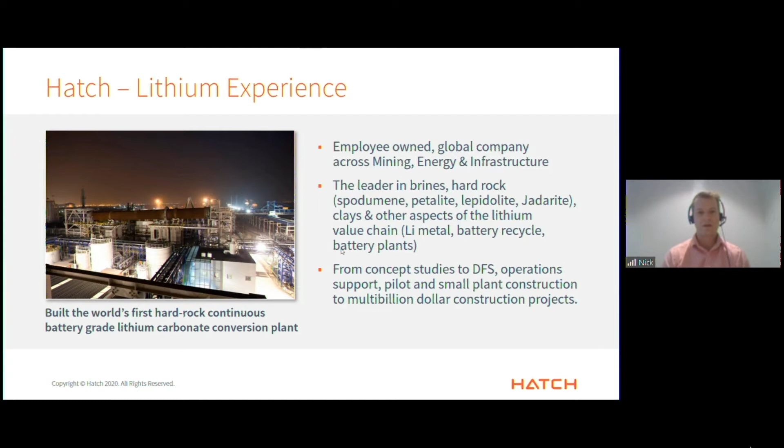Just to regain some credibility, I want to give you a brief overview of our lithium experience. We've been playing with lithium for over two decades now, well before it was in vogue, and even now. We've worked across the spectrum, including building the first continuous hard rock processing plant, which was done in China.

So the carbon imperative - why lithium? Why is this important? Why are you listening to me? Lithium is a key enabler of reducing greenhouse gases. Its position in the periodic table, in the top left-hand corner, makes it the ideal choice for use in transportation. It's light and it carries a charge that enables batteries to be used in transportation sectors. And what this does is build economies of scale and infrastructure such that it can then be used in other applications, specifically to enable renewable energy to be stored and used when it's required most, as the people in Adelaide and South Australia are certainly well aware.

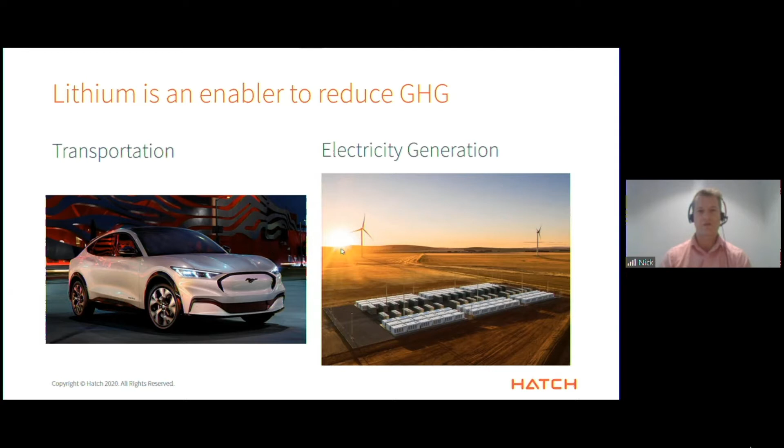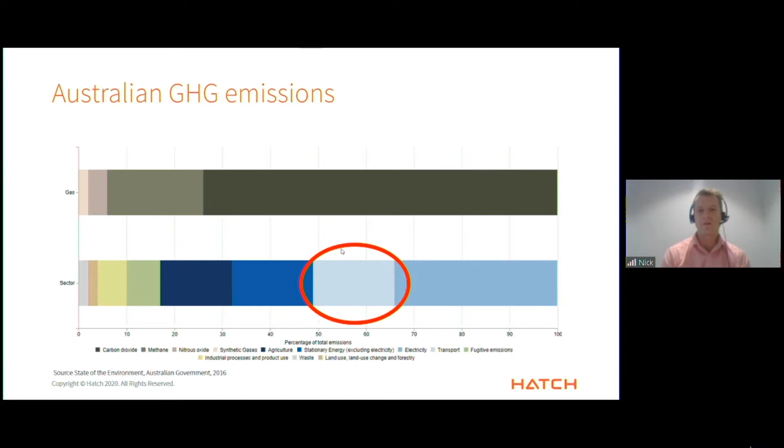So looking specifically at transportation then, because that's the real key to the growth in lithium. Looking at Australia's greenhouse gas emissions, you see about 15 to 18% is associated with transportation, and you find emissions are relatively consistent across different countries. In the United States, for example, in 2017 transportation accounted for about 29% of their overall greenhouse gas emissions. Predominantly within the transportation sector, the majority were associated with light duty vehicles - those that we're most able to replace with battery instead of internal combustion engines.

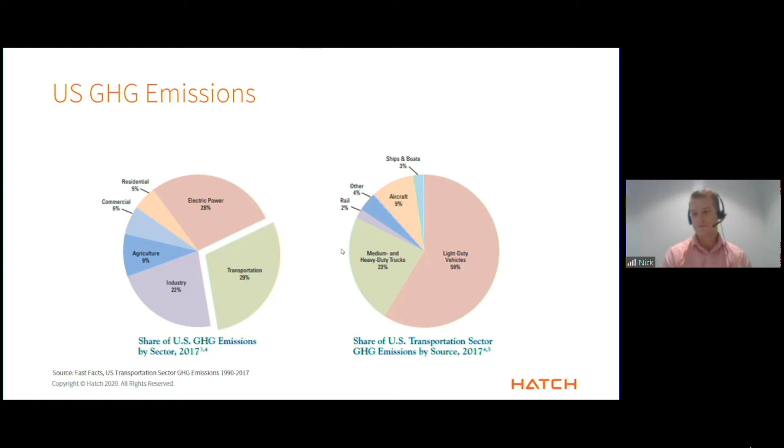Looking wider in terms of global transportation emissions, the graph on the right shows the increase in greenhouse gas emissions attributed to transportation. Again, it's the same story - within that transportation, the emissions are growing, predominantly due to road and vehicle transportation. So even within the transportation sector, the proportion associated with vehicles is increasing. If we want to be serious about tackling greenhouse gas emissions and reducing our profile, global transportation is a very large sector for us to look at.

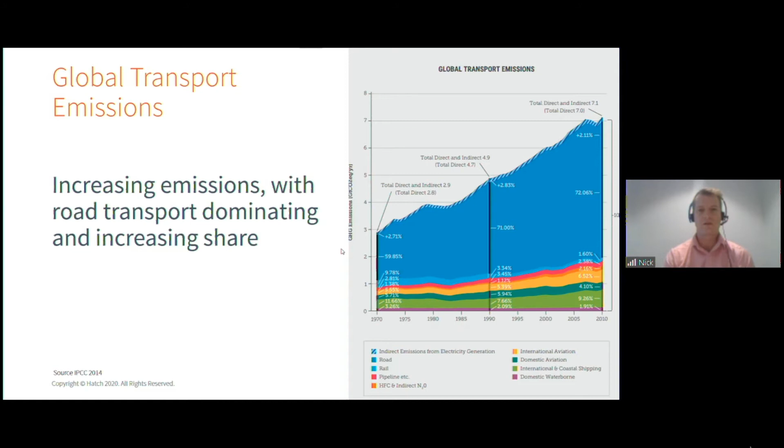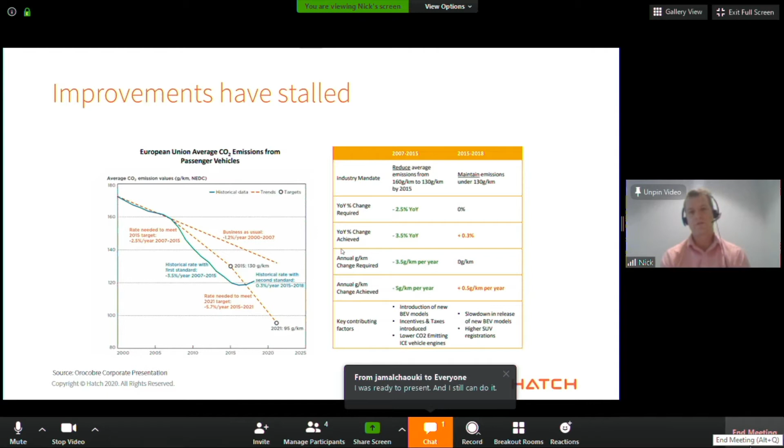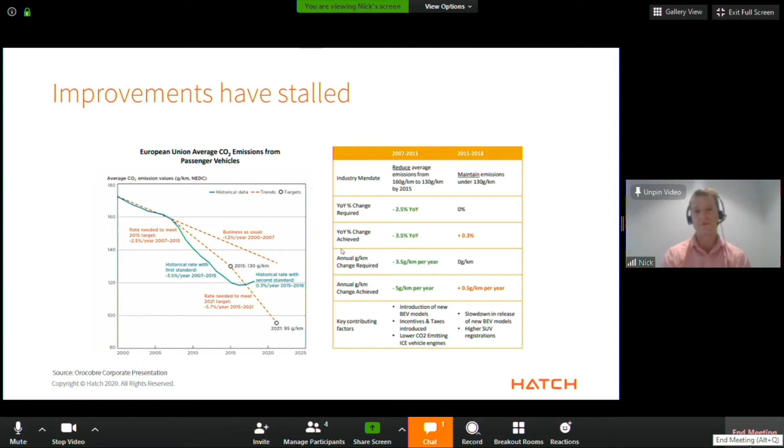And to add some pessimism, the improvements have stalled. We've seen pretty dramatic decreases in average CO2 emissions, coming predominantly through increasing efficiencies of internal combustion engines, with some replacement. But about 5-6 years ago, the downward trend stopped, and we're no longer able to achieve these targets without moving towards a more electrified transportation sector. So a step change is required if we're going to further reduce our greenhouse gas profile.

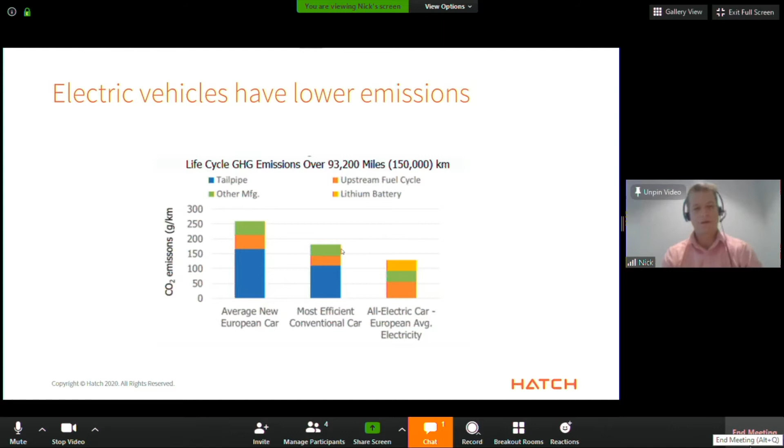Notice here that the yellow section of the graph is the lithium battery, and that's key. So that's a pretty reasonable difference between an internal combustion engine and an electric vehicle. I just wanted to explore that, particularly early on when you're looking purely at the manufacturing to get it.

So let's look into what's causing that increase in greenhouse gas emissions during battery manufacturing. I've got two graphs here. One looking at greenhouse gas emissions of the battery pack - that's this column on the right-hand side - looking at battery pack manufacturing as a whole. You'll see a reasonable amount, almost 40%, is associated with what's called the cathode. In this particular example, it's NMC 111.

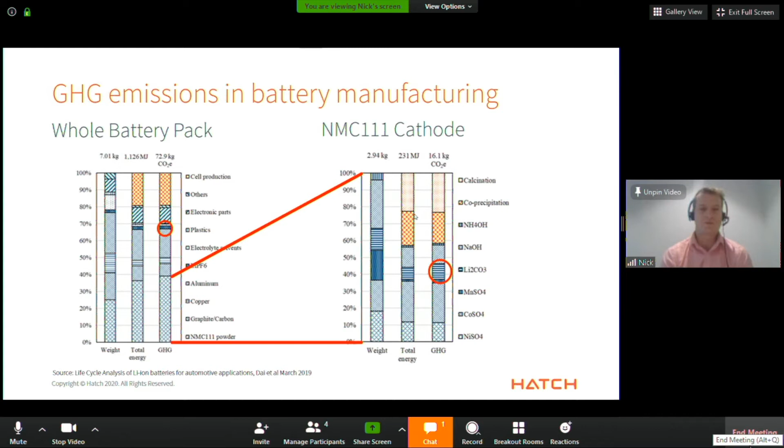This second graph is expanding that section of the graph further and looking at its constituents. So you see a couple of things. I've highlighted the different aspects associated with lithium. There's a tiny contribution here associated with lithium hexafluorophosphate, which is the electrolyte within a battery pack, and then there's the lithium carbonate contribution to the overall cathode. So the real key point here is none of this happens without lithium. Lithium's a key enabler, but it's not a significant contribution to the overall greenhouse gas intensity of battery manufacturing.

So what I want to do is just look within the lithium industry and give people a bit of background around the industry. Fundamentally, there are two main sources: you've got the brine and the hard rock, which is predominantly spodumene. These account for over 90% of your lithium.

Your brines are evaporated lakes, typically in South America, Atacama for example. Your hard rock is typically spodumene found in Western Australia, Canada, and to a lesser extent China and Brazil. The two key products, lithium carbonate and lithium hydroxide, are both a fine white powder. Just looking at that geographically, Australia contributes a significant amount associated with hard rock mining.

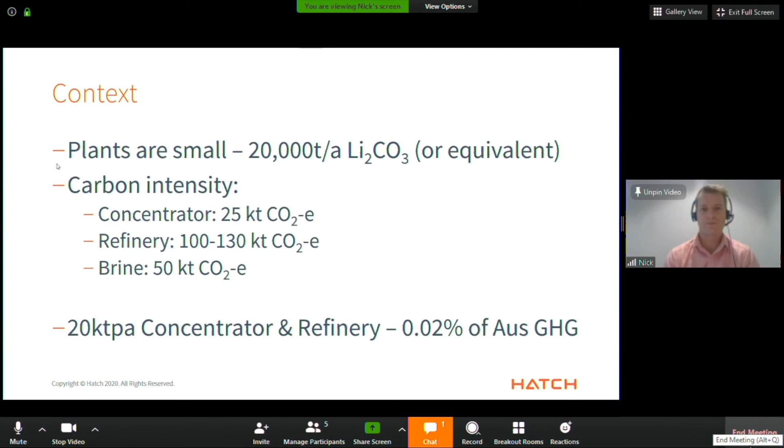So let's look at what that flow sheet actually looks like. For the hard rock processes, we mine it, produce a concentrate. We heat that concentrate up to 1100 degrees, mix it with sulfuric acid and bake it at 250 degrees.

Then it's the more boring hydrometallurgical aspect where we leach it, remove the impurities, and produce our lithium carbonate crystals, or lithium hydroxide in this case. Highlighting the high temperature aspects, the calciner runs 1050 to 1100 degrees Celsius. The acid roast is about 250 degrees. So high temperature, it's really that front end aspect.

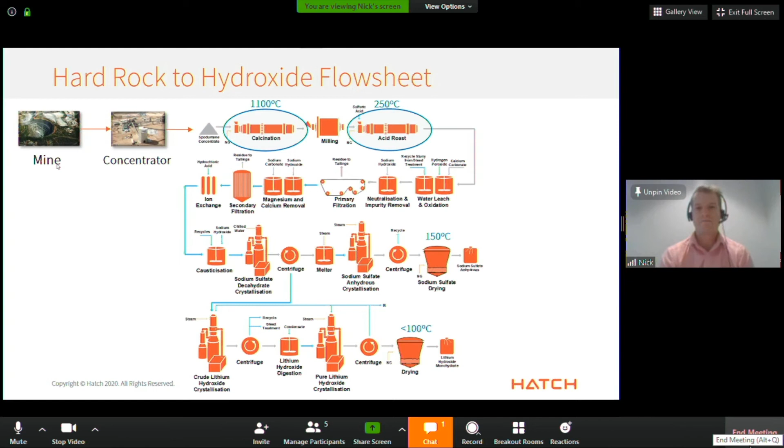The brine flow sheet is a bit simpler. We pump it up from within these evaporated lakes. We evaporate it further in square kilometres of ponds, where the sun does all the heavy lifting. We concentrate it to a point where it becomes economically viable to process, and then it's a bit of a simpler route to remove the impurities and precipitate our lithium carbonate.

So I'm aware I'm speaking at a high temperature conference. I was struggling to make the brine flow sheet relevant, and then I thought about the key unit operation, and the only reason this pathway is economic is because it had a unit operation operating at above 5,000 degrees Celsius. But then I realised that predominantly that unit operation was already hydrogen fueled, and so not that relevant to a forum specifically talking about greenhouse gas emissions.

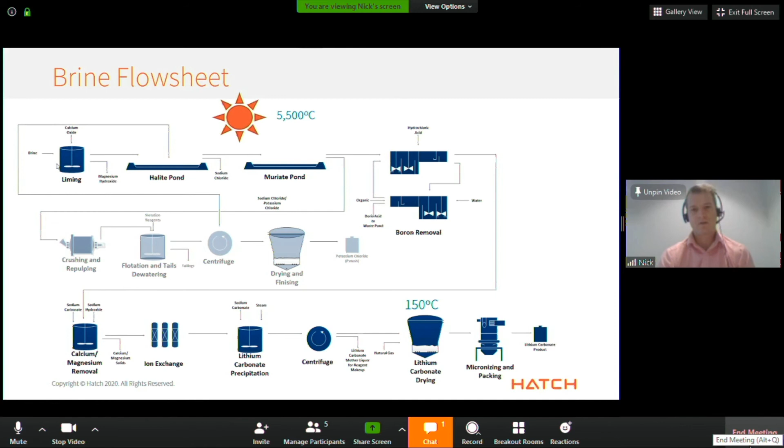So I'll continue on and look at carbon reduction within the lithium industry. Predominantly, in the carbon intensities of the different flow sheets, for hard rock refinery processing, two thirds of those scope 1 and scope 2 emissions were associated with electricity consumption.

One third was really the natural gas to fire your calciners and acid kilns. Two thirds is associated with the electricity, predominantly driven by your hydrometallurgical processing. However, decarbonisation in the lithium flow sheets really focuses on the kilns, to look at those scope 1 emissions, and what we can do to reduce carbon intensity in that processing.

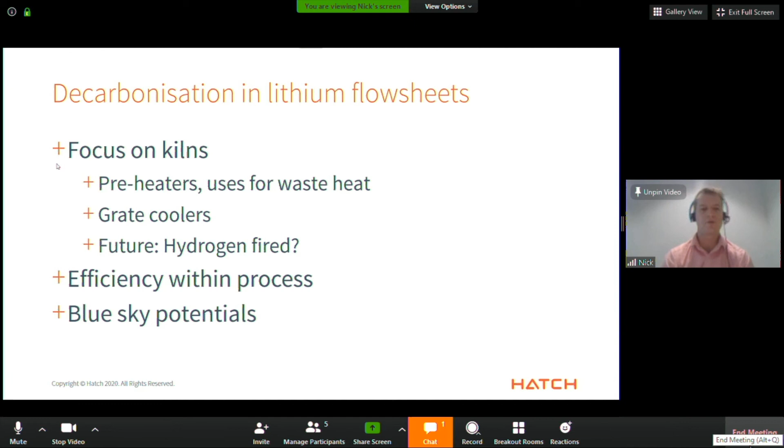Fundamentally, if you're looking to make a step change reduction, there are efficiencies within the hydrometallurgical process we can do, and then a couple of blue sky potentials towards the end. So now, focus on the calciner.

This is a calciner with preheating, grate cooling, and use of waste heat. This isn't going to look revolutionary at all to anyone familiar with the cement industry, but this is only starting to gain traction within the lithium industry. As I mentioned, the plants are small.

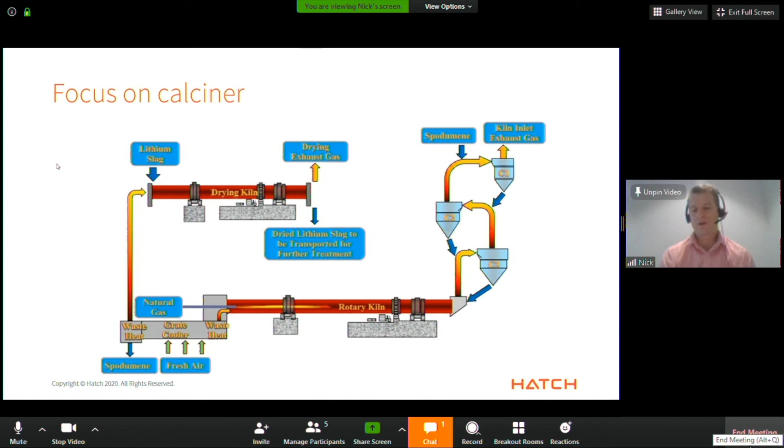It's only now we're starting to see improvements in the industry, such as the use of preheaters, grate coolers, and waste heat. So there's still scope for reduction there in terms of some of the greenhouse gas potential.

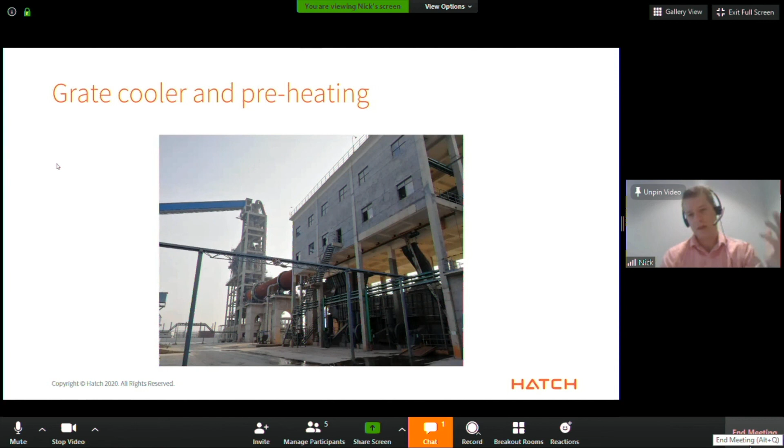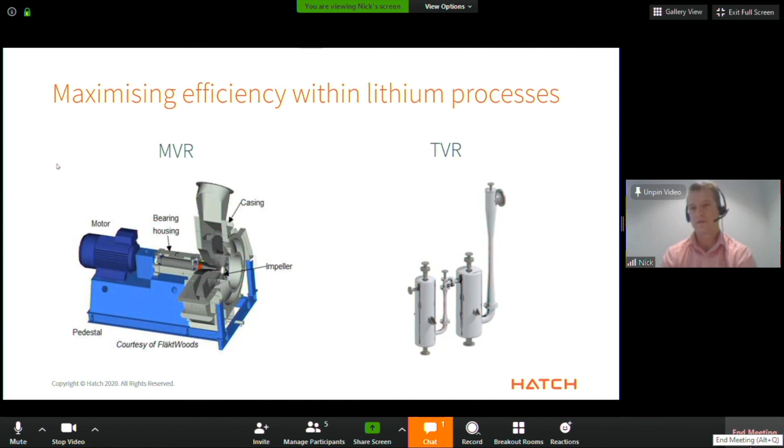Here's a picture. For maximising efficiency within the process, we can look at MVRs using electricity as opposed to TVRs using steam, and also minimising water ingress.

I suppose one of the key aspects I wanted to draw attention to is a bit beyond the scope of a lithium flow sheet, but to really highlight the fact that cathode manufacturing itself accounts for about 40% of the greenhouse gas emissions, from the calciner and co-precipitation of that battery material.

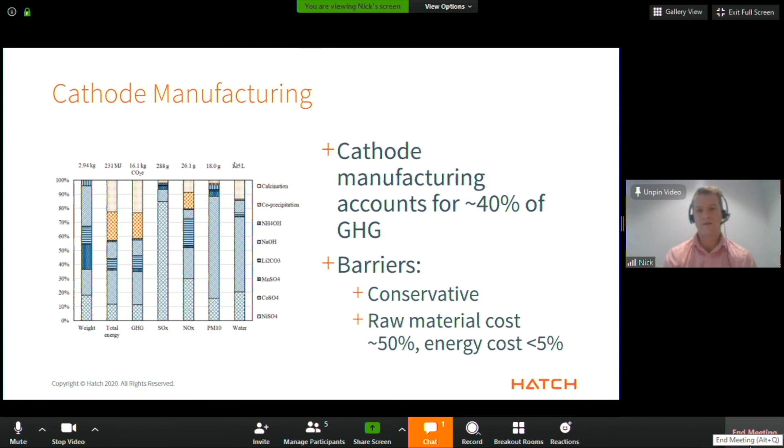There are issues with trying to change this process. Fundamentally, it's a very conservative industry, but also the operating cost drivers are not there. The raw material cost is 50% of the cost of your cathode manufacturing. The energy cost is very small.

Looking at the cathode manufacturing process, there is some fruit there for us to improve, particularly this final step, which is the sintering kiln operating at elevated temperatures. That, to me, and Gus hasn't paid for the sponsorship, but it is a high purity solar calcination. I mean, that just reeks of potential there.

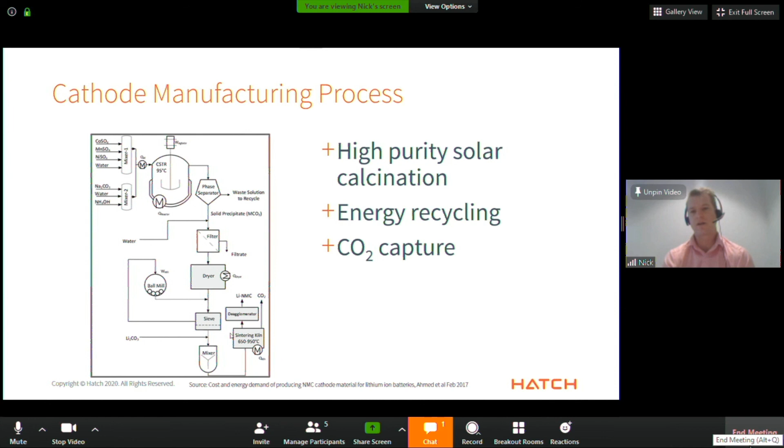But even within this process, there's opportunity for energy recycling and carbon dioxide capture. So finally, lithium's an enabler. It's not a key contributor, but for us to implement any of these changes, you need lithium. So we're progressing. We're a recent and immature industry, but we're looking down that pathway to reduce our greenhouse gas within the industry.